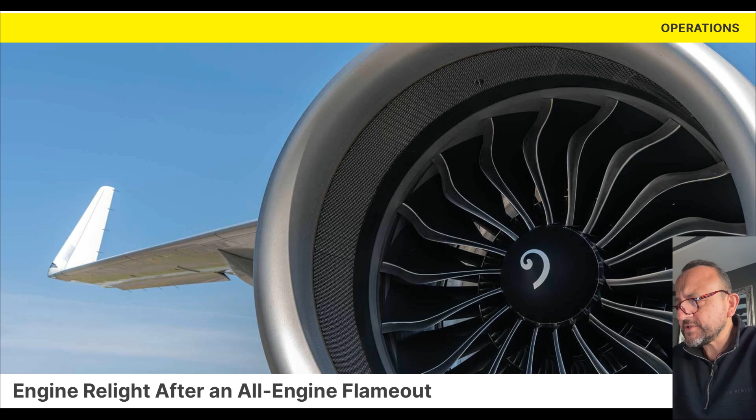In this episode we're going to take a look at the article that was in Airbus Safety First concerning an A320 which suffered dual engine failure, unreliable airspeed, and cracked windshields as it experienced some significant weather. It's somewhere in Brazil, I think. The name of the airline is not really relevant, but there are a number of lessons here to be learnt.

The article focuses quite specifically on the changes in the procedure to the all-engine fail QRH or EQRH and the all-engine failure procedure and the ECAM, and how Airbus changed that a few years ago to make it a little clearer, and the very distinct difference between relighting engines via the windmill engine start or by the assisted start via the APU.

The article focuses very much on that, and goes through the flight data recorder and how the crew dealt with the engine restarts and the lessons to be learnt there, and the conclusion talks about the change in the procedure and how that's written, and the very clear difference to make it a little bit clearer.

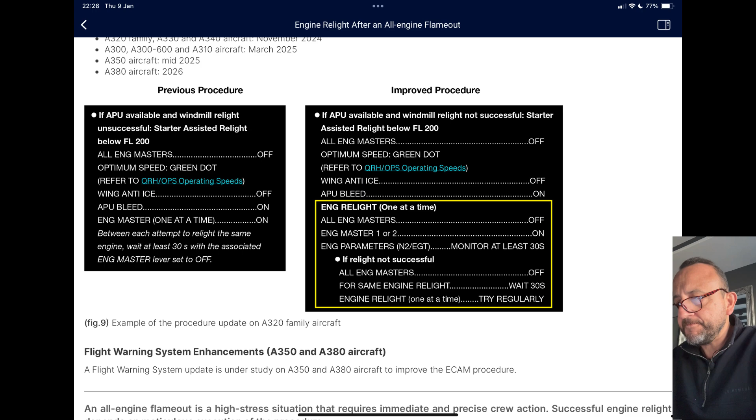As with all of these case studies, we're not here to criticise. I think there's some learning points in this, and there's a few others that I'd like to expand on that the article doesn't really go into in too much detail about, as it focuses specifically on the relight procedure. But there are a few questions that I was asking myself as I was reading through it.

So as I say, I don't know the area. I don't know too much about it. I think there's a little bit on the internet if you want to take a further look at it. I haven't seen a report other than what you're able to read in Airbus Safety First. Anybody has access to this and can read it. If you haven't read it already, then I'm going to read it through with you now and then expand on a few areas.

The case study, as I said, concerns an A320. I believe it was somewhere in Brazil. Just to give you a bit of background on the story, they diverted to an airport due to some significant weather. They spent about 3 hours or so on the ground at that diversion airfield before setting off again to try and make it to their destination. And it was during that flight where they encountered significant weather.

Now, I'll bring a few figures up on the screen for you here, and the first one we'll take a look at is just this picture here, which shows the diversion airport and the initial destination airport, and you can see there the significant weather. I'm going to go through each of these points with you in just a moment, but the first thing for me is why the crew actually went through this weather in the first place.

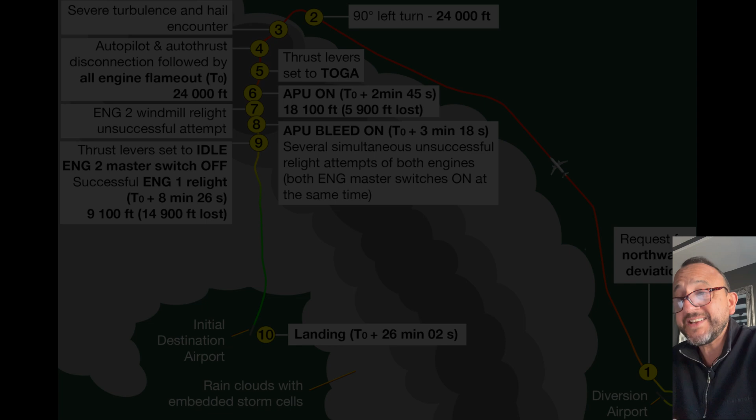The flight recorder data is not available for the following 2 minutes and 45 seconds due to the EMER ELEC configuration. Now, I didn't actually know that the flight data recorder didn't record during the EMER ELEC, but during this time, the thrust levers were then moved to the TOGA position. Now, I don't know why the crew would have gone to the TOGA position. Maybe this was a startle effect.

Perhaps they hadn't appreciated what was going on at the time. Obviously felt that perhaps the speed was decaying. At this point, they may have had unreliable airspeed and felt that putting the thrust levers to the TOGA position would have given them the extra thrust that they needed. So there must have been some confusion at this point as to exactly what was happening.

So now they're manually flying the aeroplane in the EMER ELEC config. Now both engines had flamed out, combined with unreliable airspeed indication. The flight crew very quickly switched the APU on. Now remember, they're at flight level 240, or they were when they initiated the procedure. So thinking about the APU start limitations in EMER ELEC config, you can start the APU below flight level 250, and bleeds available obviously below flight level 200.

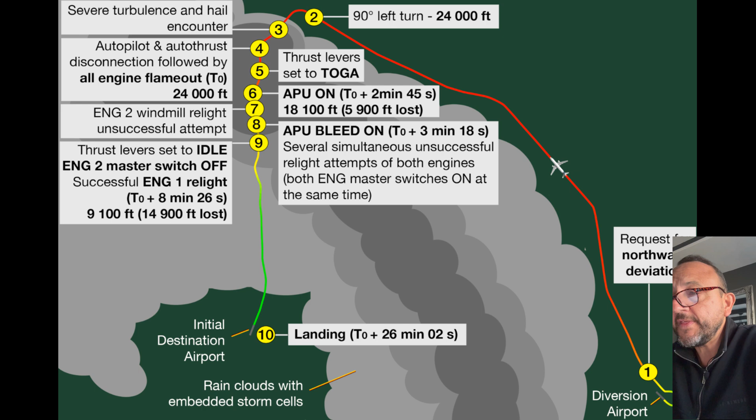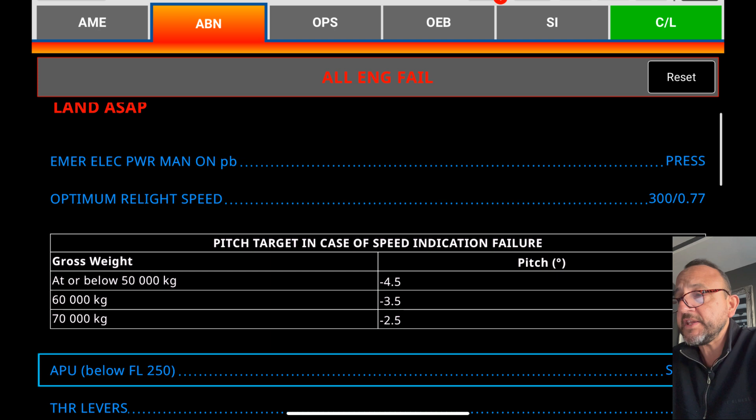When the APU came online, electrical power was restored, and the aircraft pitch was minus 3.5 degrees, corresponding to the pitch provided in the QRH to reach the optimum windmill relight speed. So the crew must have been very quick to refer to that QRH, and if you look at a CEO at around 60 odd tons, minus 3.5 is just about right.

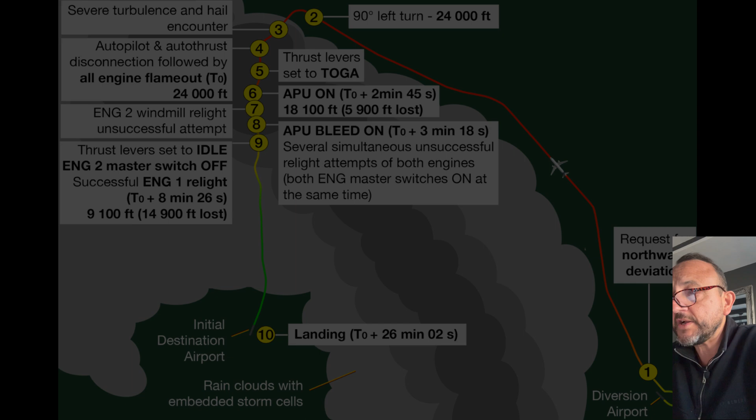The speed, which was unreliable, was showing 232 knots indicated on the captain's PFD, and the aircraft altitude at this point now was 18,100, which is 5,900 foot loss from the initial cruise altitude. The aircraft was in alternate flight control law, and the thrust at this point remained in TOGA. Now we'll come on to why that's significant in the article in just a moment.

So just to recap here, both engines failed, an altitude loss of about 5,900 during the process. The pitch attitude of the aircraft was at minus 3.5, corresponding to the QRH for a windmill restart. The aircraft now, with electrical power restored, having put the APU on, is in alternate law, but the thrust levers remaining in the TOGA position. The windshields are damaged, the radome is damaged, and this is why they had the unreliable airspeed indication. So some quick thinking there in terms of commencing with the procedure. And the article will now talk about the windmill relight attempt.

Excuse me. Actually, I get a lot of questions in the simulator about why the APU in EMER ELEC config is limited to flight level 250. And you've got to think about the fact that starting the APU is only ever on batteries. The APU works slightly differently to the high bypass engines that we have in the CFM or the Neo engines, and it's pretty much a pure jet engine, Garrett, I believe.

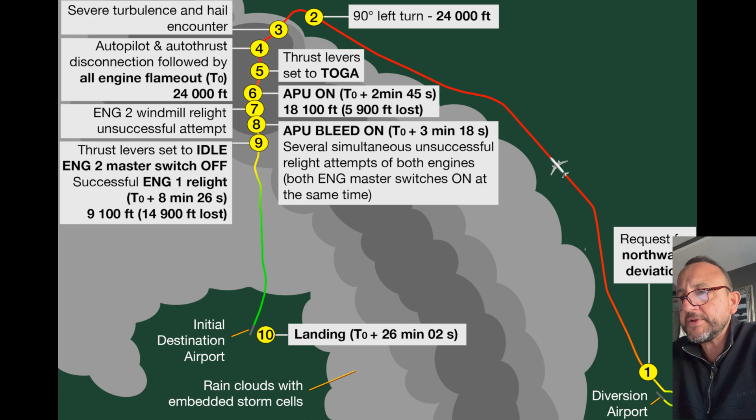Starting on batteries only. If you've ever started an APU in normal configuration at higher altitude, if you've ever needed to, you'll notice it takes longer. There's a chance there that you could drain the batteries, and that's why when you're in the EMER ELEC config, there's a limitation to make sure that you've got enough compression to have a successful restart. And that's a similar situation with the engine's windmill start as to why 250 is the level.

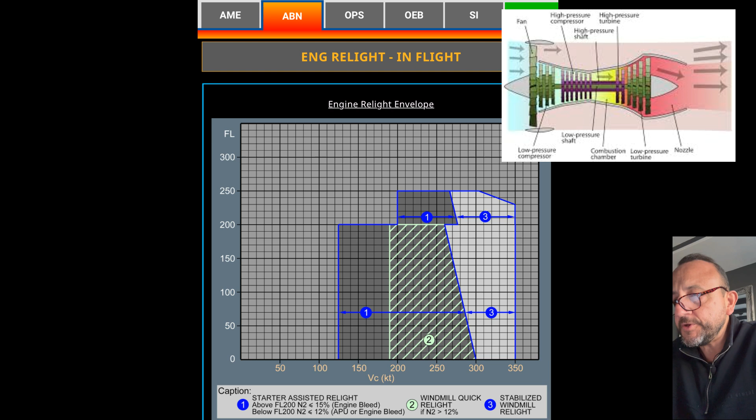For a similar reason, you need enough compression in the compressor into the combustion chamber to have a successful relight, and below 200 the APU and the bleed can be used to assist that start. But we'll talk more of that in a minute. But the limitation specifically for the APU is because you're on batteries, and we don't want to drain the batteries. We want to have a reasonable amount of pressure inside the compressor to get that APU started.

I seem to remember, I don't know which article it was, but I believe it was on a Boeing where they had a dual engine failure and they tried to start the APU much higher. They had 3 or 4 attempts at trying to start it, and they flattened the battery.

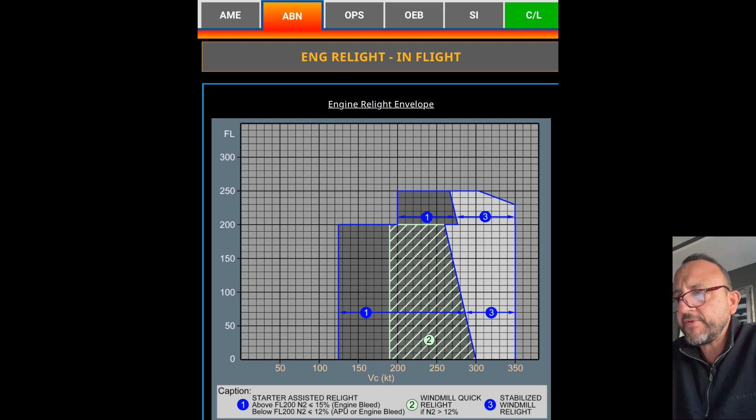But that's essentially why we have a limit on the APU. Okay, so we leave it now in alternate law, thrust levers remaining in the TOGA position. Now, one windmill relight attempt on engine number 2 is recorded, and then the flight crew switched the APU bleed on and performed several simultaneous attempts, and that's the key point here. Both master switches on at the same time, so there must have been some confusion here as to whether they were doing windmill or whether they were doing starter assist.

Again, the thrust levers were still in the TOGA position. Obviously, they need to be at idle in both the engine windmill relight and the assisted start. The flight crew eventually set the thrust levers to idle and both master levers to off before performing a successful engine 1 starter assisted relight with engine master 2 switch left in the off position. And that's why engine 1 relit, because engine number 2 remained off.

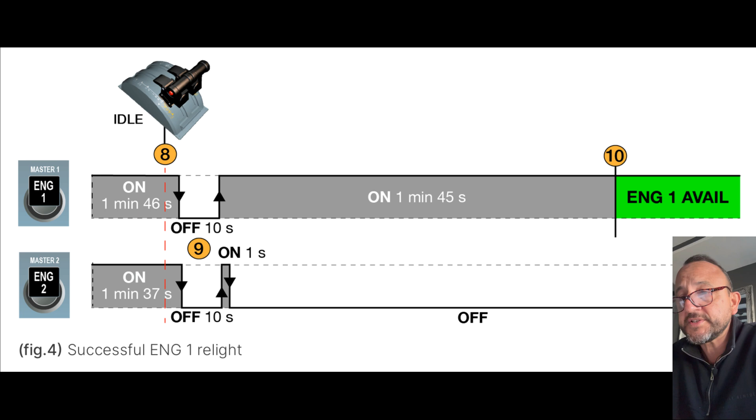The altitude was 9,100, representing a loss of 14,900 feet from the initial cruise altitude. The flight crew then tried to relight engine number 2 twice, but both attempts were unsuccessful. The report then goes on later on to say, I don't think they were ever going to restart engine number 2 because it sustained too much damage. And in fact, the engines consumed, I don't know how they find this information out, but twice the amount of ingestion of water than they're designed to have. But I think engine 2 sustained too much damage.

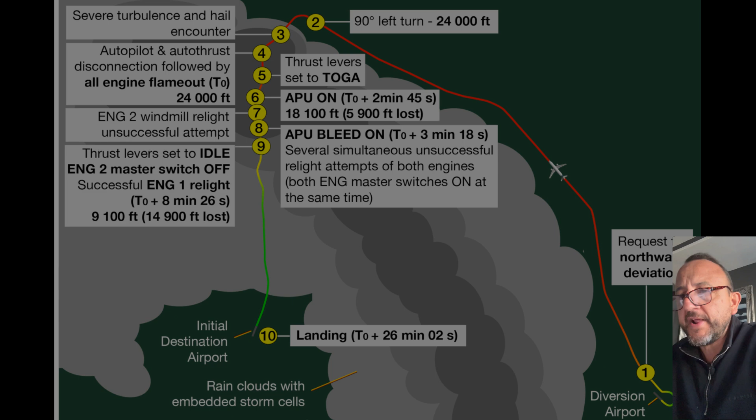The aircraft emerged from the storm and continued to the destination airport, and the flight crew performed a safe landing. It was single engine inoperative, alternate law, unreliable airspeed, and significantly damaged windshields, impairing visibility. So let's just read that again. Emerged from the storm and continued to the destination. They performed a safe landing, single engine, alternate law, unreliable airspeed. They couldn't see out the windscreens. I have to say, that's quite an effort.

That's quite an effort. So we mustn't forget, when we've taken some learning points from here, and a lot of questions could be asked about the decision-making process here. But to come out the other end and bring the aircraft to a successful landing would have been enormously challenging. So they have to receive some congratulations at least for that.

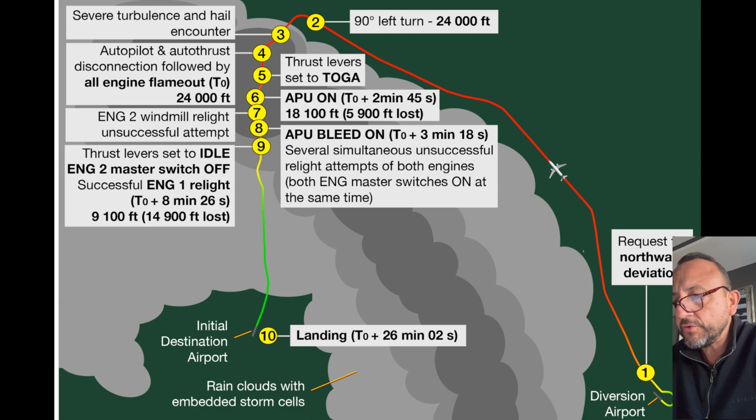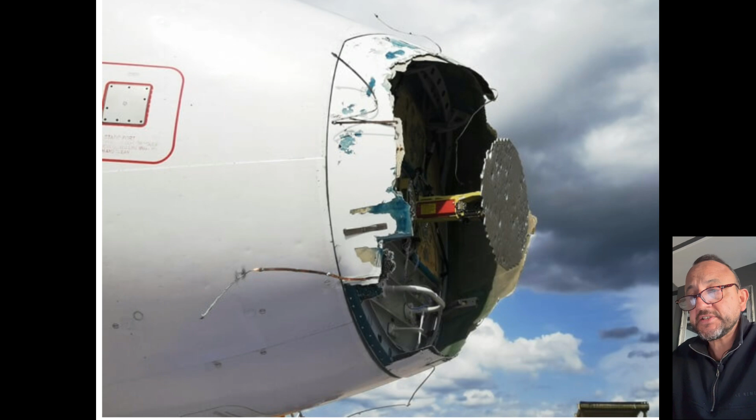Right, so event analysis. Unsuccessful weather avoidance. Night conditions and numerous storms in the area made effective weather avoidance challenging. Despite having an automatic radar and performing both automatic and manual scanning, the flight crew entered a severe hailstorm.

So the next figure 4 talks about a successful engine 1 relight. Now the crew set the thrust levers to idle, set both master switches to off. The engine 1 master switch was set back to on, whilst the engine 2 was briefly set to on, then back off. Within 1 minute and 45 seconds, engine 1 N2 and EGT increased, and engine 1 started successfully.

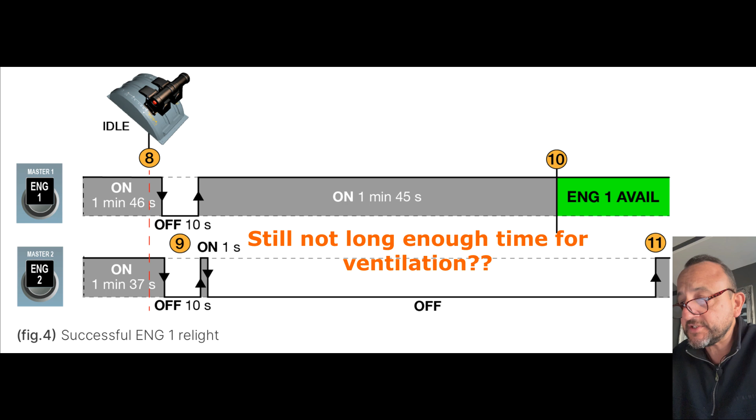So the successful procedure for the assisted start was performed, and albeit engine 2 was put on very quickly, it was turned off very quickly, and then 1 minute and 45 seconds later, engine 1 was available. So that just goes to prove the point.

Engine 2 damage. The flight crew then tried engine 2 relights. Both attempts remained unsuccessful, and detailed inspection revealed sufficient damage to engine number 2 preventing a successful in-flight restart. Engine 1 became available 8 minutes and 26 seconds after the all-engine flameout. The aircraft altitude was 9,100 feet, representing a 14,900 foot loss from the initial flight level 240 cruise altitude.

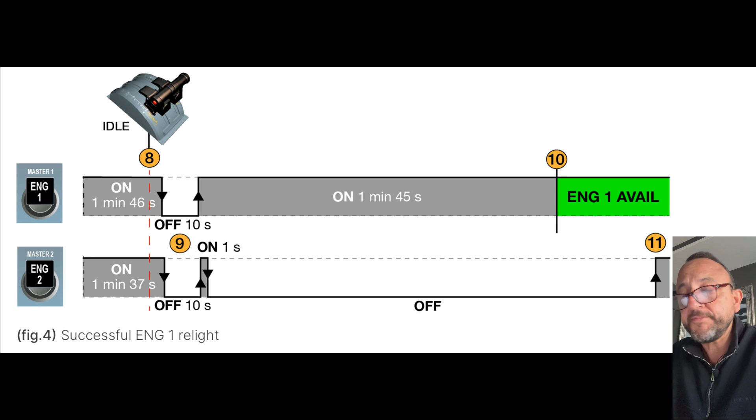So there you go. 8 minutes and 26 seconds. They were essentially without power, some lessons to be learnt there about the difference between the two procedures.

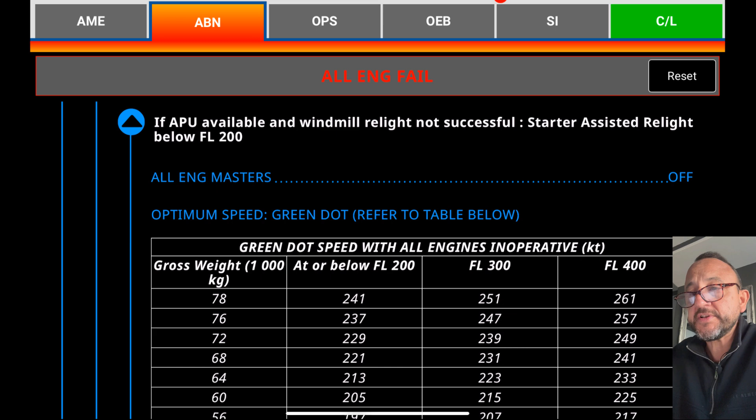Now, operational considerations: careful application of the windmill and starter assisted relight procedures in the all engine failure QRH procedure for the 300, 10, 20, 30 and 40 and the all engine failure ECAM for the 350 and 380 is critical for successful in-flight restart. Now, in the case of an all engine flameout, the windmill relight is possible at higher altitude, that's between 25 and 200, whilst a starter assist is only available below flight level 200. In addition, a windmill relight enables the flight crew to perform simultaneous engine restart attempts.

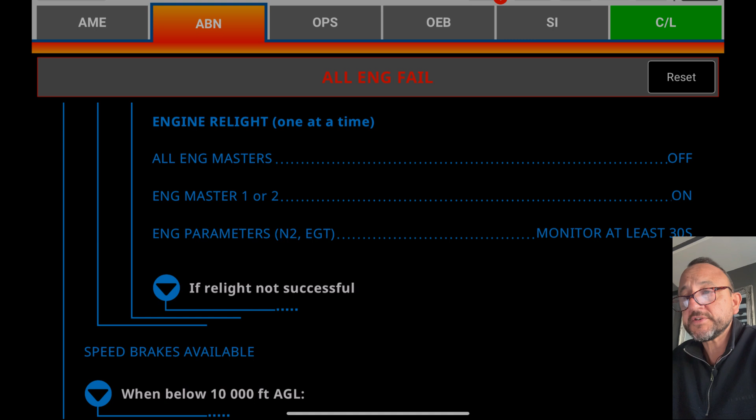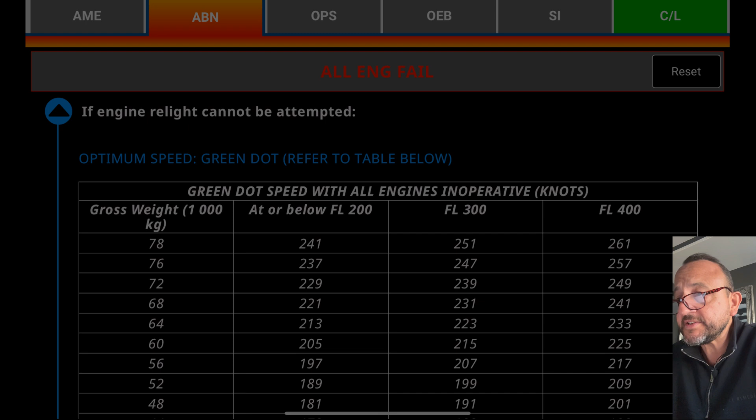To maintain the optimum relight speed is important because it provides sufficient airflow for the engine to reach a rotational speed that produces sufficient compression for the air compressor and combustion chamber necessary for an engine relight. That's very important. The optimum engine relight speed is provided in the all-engine failure procedure QRH for the A320, 30 and 40, and it talks about the other aircraft types.

Thrust levers set to idle. The positioning of the thrust levers to idle will enable stable idle restart and reduce the risk of stall that may be caused by immediate acceleration to high thrust if the thrust levers are maintained above the idle position. So that's explaining why it's important to have the thrust levers idle. The engine mode selector is set to ignition to activate combustion chamber igniters.

All master switches off for 30 seconds. Now, whether you're doing a windmill relight or starter assist, after an attempted start, they have to be switched off for 30 seconds. This will ventilate the combustion chambers to prevent any residual fuel before the first relight attempt and between relight attempts. Failure to ventilate the engine may result in engine stall, an EGT overlimit, tailpipe fire, or an unsuccessful relight attempt. So some very important steps there.

You can have a bad day, I think, if after trying to start an engine, it's stalled, EGT overlimit, a tailpipe fire, or an unsuccessful relight attempt. Yeah, that's a bad day, isn't it?

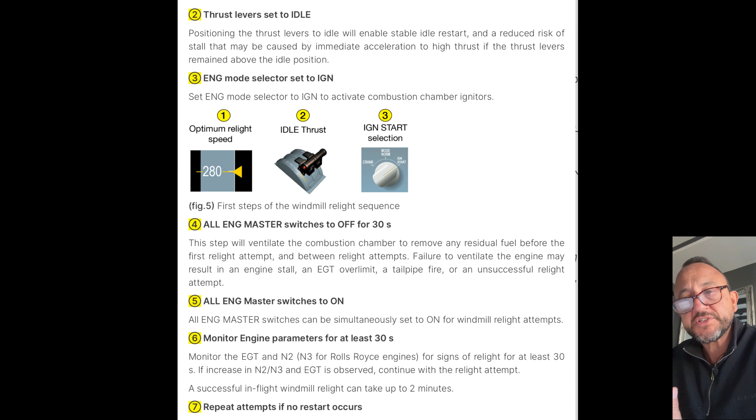So if after those 30 seconds you see an EGT increase and you start to see N2 increase, then you can see that it's starting, but it can take up to 2 minutes. Repeat attempts if no restart occurs. If no relight appears within 30 seconds, or no sign of a relight within 30 seconds, switch both engine master levers to off for 30 seconds to ventilate the engines and repeat the relight attempt until successful or until reaching flight level 200, where a starter assist can be attempted.

Now, figure 6 talks about the windmill relight sequence, simultaneous relights, and it's very clear in there. Switch the engines on. If unsuccessful, turn them both off for 30 seconds. Then after the 30-second dwell time, both can go on. Monitor the EGT and N2 for a minimum of 30 seconds. If no sign of a relight, start the process again, off for 30 and then back on. Just remember that is for a windmill relight attempt.

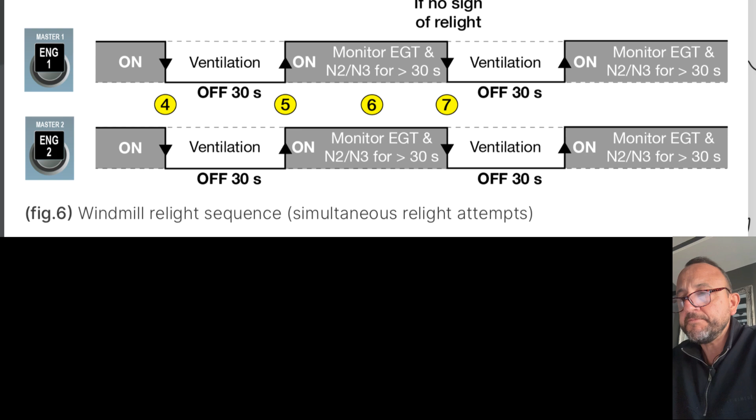Now, below flight level 250 to flight level 200, if the windmill relights haven't been successful, then we can commence with the starter-assisted relight below flight level 200. Now, the all-engine fail QRH procedure requests to start the APU when below the upper limit of the APU battery restart envelope, enabling recovery of the electrical power and the use of the APU.

Now, below 200, if the windmill relight was unsuccessful and the APU is available, the flight crew can attempt a starter-assisted relight. Thrust levers go to the idle position. We've explained why that's important. The engine mode selector goes to ignition to allow ignition into the chambers. Master switch goes to off for ventilation to remove residual fuel from the combustion chamber before any engine relight attempt. The time to perform the next two steps ensures a sufficient ventilation close to the 30 seconds.

Reduce the speed to green dot. Whilst the engine masters are switched to off, reduce the speed back to green dot. There's no point now in high speed because we've already attempted the windmill. Now, if we're using the APU bleed assisted start, there is no need. We can now come back to green dot, and this will reduce the rate of descent. APU bleed goes on. Only one engine master switch on. The flight crew must attempt to relight only one engine at a time during a starter-assisted relight.

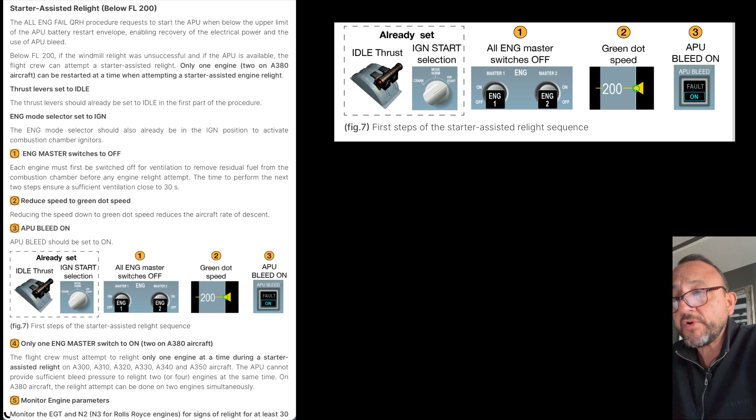Monitor the engine parameters. Monitor the EGT and N2 for signs of relight for at least 30 seconds. We should see an N2 and EGT increase. If you do, then continue with that start attempt. A successful in-flight starter-assisted relight can take, as we say, up to 2 minutes. If no sign of relight within 30 seconds, all engine master switches to off. If there's no sign of relight within 30 seconds, the flight crew switch the masters back to off to ventilate the engine. Now, two options are then possible.

Now, you can make an immediate relight attempt of the other engine. So the flight crew can then attempt to relight the other engine immediately, since it was ventilated during the relight attempt of the first engine. So you can see where the 30 seconds comes in now, can't you? In giving it time to start. If there's no sign at 30 seconds of the start, then you can go master switch back to off, and during that time the other engine is ventilated, and then you can start the other engine. So that's one option.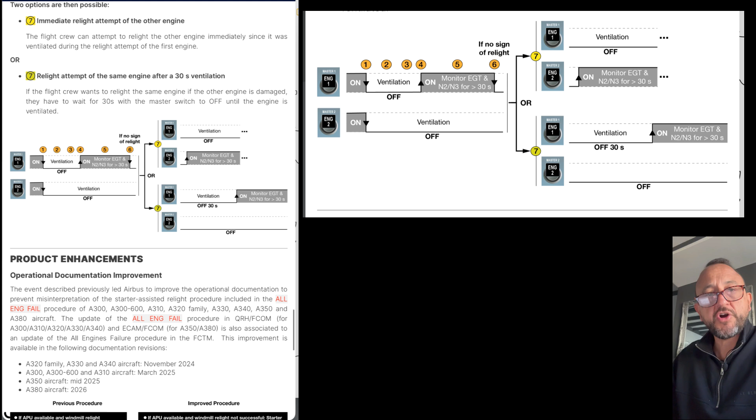The other option is a relight attempt of the same engine after 30 seconds. So switching it back off for 30 seconds. Should we try the other engine? Well, if it looks like you've got no N1 rotation whatsoever or N2 rotation, it may well be damaged, and that's another procedure. But in which case, you might want to try and start number one again if that looked like the better engine, or it might be the case where they were just a rundown, and then you can just go ahead and start the other engine. And this figure here talks about the various options that you have in either restarting engine number one or trying number two. And I'll bring that up here for you.

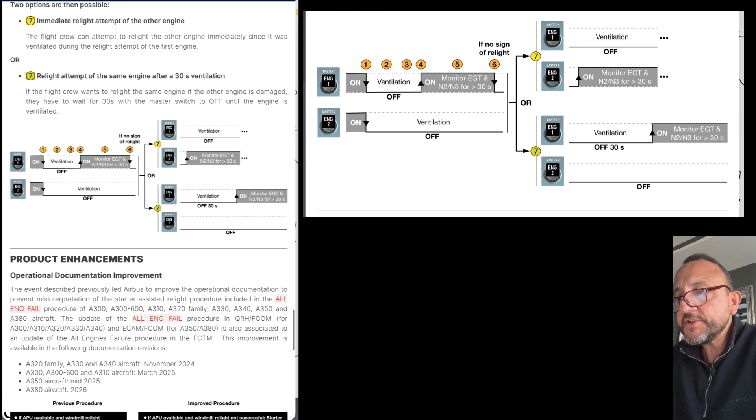So the article then finishes with the product enhancements. The event described previously led Airbus to improve the operational documentation to prevent misinterpretation of the starter-assisted relight procedure, including the all-engine fail procedure of the A300, A310, A320, A330, A340, A350, and A380 aircraft. The update of the all-engine fail procedure in the QRH and the FCOM, and the ECAM FCOM for the A350. It's also associated to an update of the all-engine fail procedure in the FCTM, and this improvement is available in the following documents, and it lists them all there.

We can see here the two boxes: the previous procedure and the improved procedure, and then highlighted in the amber box beneath where the APU bleed goes on. It talks about engine relight one at a time, and then engine masters one or two on. So it adds a little bit of clarity, and then talks about if relight not successful, all engine masters off. For the same engine relight, wait for 30 seconds, and then engine relight one at a time. Try regularly. Important there, one at a time.

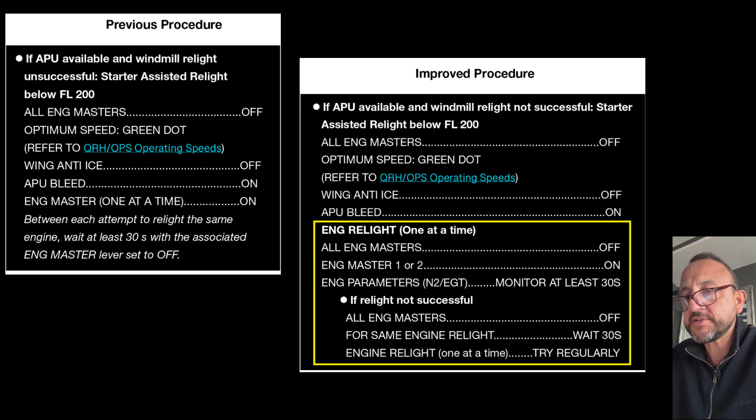And then it talks about some flight warning enhancements on the 350 and 380. And then finally, an all-engine flameout is a high-stress situation that requires immediate and precise crew action. Successful engine relight depends on the meticulous execution of the procedure. It's an important point, that, isn't it? It's a very highly stressful situation to be in, and I imagine all the environmental conditions that they were experiencing at the time would have added to that significantly.

The 30 seconds engine ventilation removes any residual fuel from the engine's combustion chamber before the first relight attempt and between relight attempts if unsuccessful. It prevents risk of engine stall, EGT overlimit, tailpipe fire, or unsuccessful relight. Windmill relights enable attempts to restart all engines at the same time at a higher altitude. Starter-assisted relights enable restart of only one engine at a time due to APU bleed air limitations and can only be performed below flight level 200.

Flight crew should monitor the EGT and N2 for signs of relight for at least 30 seconds. If there are signs of relight within 30 seconds, continue with the current engine restart attempt. A successful in-flight relight can take up to 2 minutes. If there are no signs of a relight within 30 seconds, all engine masters to off and initiate a new relight attempt. The event described in this article also illustrates the importance of maintaining situational awareness during emergencies and correctly applying QRH procedures during an extremely stressful situation.